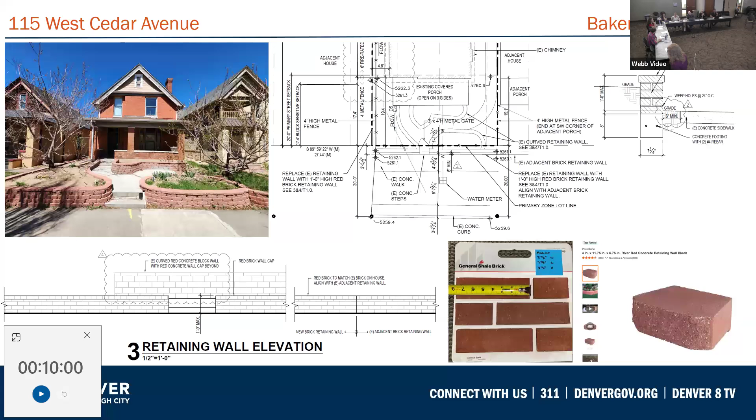Hi, this is Dan Delaney. Hi, yeah, we can hear, can you hear us? We can. Oh, okay, excellent. You've got 10 minutes to tell us about your project, and when you begin that 10 minutes, please start with your name and your address for our records. And take it away. Okay.

Yeah, this is Dan Delaney with Delaney Architecture, Rio Delaney with Delaney Architecture, and Mark Haugen, the owner of the property. Okay. And we're all at the same computer. Okay. Does the computer have an address? The address is 115 West Cedar Avenue. Great, thanks. Yeah. And so you've seen the narrative we sent.

I don't know if everybody had a chance to read it, but we'll start with the siding on the gables that the owner Mark has installed. It's what they call the fish scale, and it's true wood, which is an approved material, and he would like to keep that and feels that it meets the intent of the historic guidelines, and would prefer to have it on all sides, all four gables if possible. At least that's the position we want to take on this.

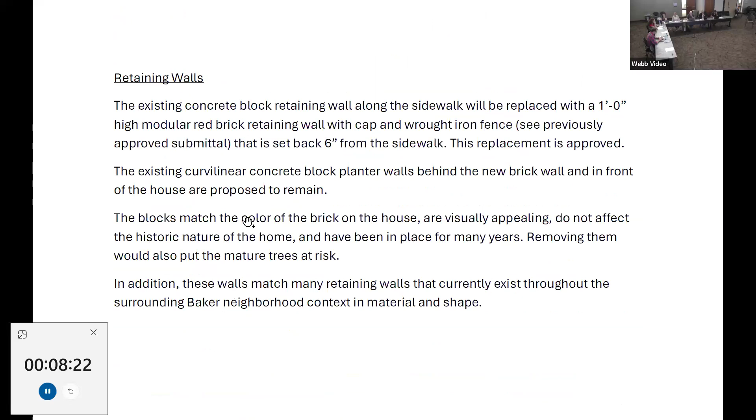And I guess we'll move into the masonry next. Do you want me to do that in this time frame? That'd be great. Okay. On the masonry, we are replacing the front trapezoidal block with the brick that matches the house as best that we could find, and that would be 1 foot high, and that'll go up to the sidewalk but 6 inches back, which is what the right-of-way requested. So there will be a 6-inch gap between the sidewalk and the wall, and then it'll have a cap, and there's a wrought iron railing too that'll be on that beyond the wall a little bit.

And it'll actually wrap on the west side. It'll wrap until it cannot go any further to the back of the house, just because of the grade that's there between the two houses. The house on the west is a little lower, and that retains the dirt, and also the dirt that is at the trees that are there too, to help preserve those.

The trapezoidal planters that are closer to the house, we would like to propose leaving those. We've seen lots of examples throughout the neighborhood, over 20. There's all sorts of examples of it in the neighborhood, and we feel that being closer to the house, it's back far enough where it doesn't really distract from the overall appearance of the house.

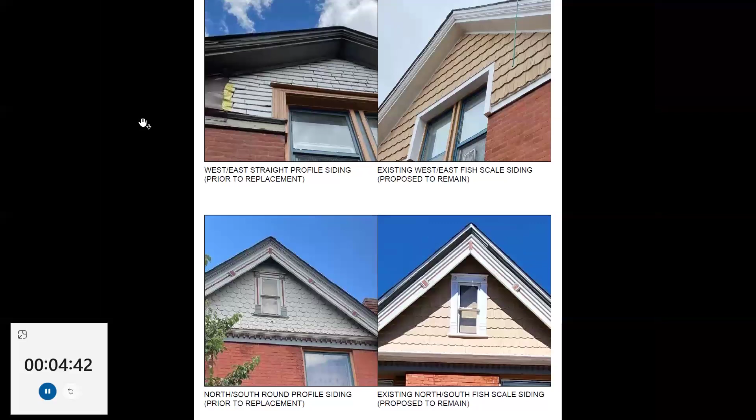This wall that's along the sidewalk would butt up against the existing brick wall that's on the west side of the east neighbor, and so it'll tie into that. The elevation of the grade is about the same for both of those houses. I think that's about all that I had. And you can see some examples that we've taken photos of around the neighborhood that are similar to this house. And some of them have the trapezoidal wall block that's up to the sidewalk. Of course, we're removing that with this property.

And we'd like to have the ones where the planters are back, behind the metal fencing and brick wall, closer to the house. Also, we'd like to keep the curvilinear aspect of those planter walls in the back. And the examples show numerous other locations that use a curvilinear at the entrance walkway. Right, yeah, I did mention that. Yeah, so the examples are in that one attachment of what we saw around the neighborhood, and this isn't even half of them. But we thought these were the best examples that came close to this property.

Also, the wall has been in place for many years. Yeah, how long? I really don't know. I'm guessing 8 or so years. Can you hear Mark? Yes, I can. Okay, very good.

Okay, anything else, Mark? Well, on the shingles, there are other houses that have the fish scale shingles in the neighborhood on the side gables. In fact, my neighbor has a combination of fish scale and rectilinear shingles on the same face. And that's on their west side, which is my east side. Yeah. The west side of the house that's on the east.

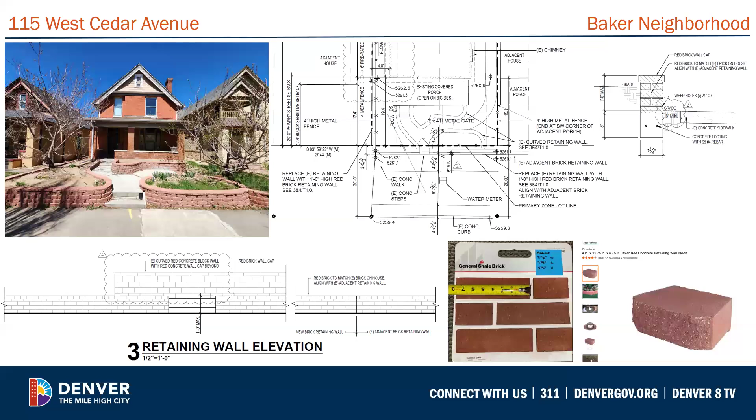Any other questions for the applicant, commissioners? Doesn't look like it. Okay, great. Do we have any public comments? Anybody joining us virtually that would like to make a comment for design review projects? Anyone here in person can raise their hand and talk for 2 minutes. Anybody joining virtually can click the hand raise button on Zoom, or dial *9 on your keypad if joining by phone. You can always email us at landmark@denvergov.org with your name and phone number, and you'll have 2 minutes. Do we have anybody?

Doesn't look like it. Okay, then, being that there's no public comment, Jesse, did you have any other comments? Yes, I do. Could you bring up the presentation again, Brittany?

Sure. Oh, I said sure. Sure, Brittany can. Sure, Brittany will do it. Because she's just so good, I know she can do it.

Which slide do you want? Just the first one will be fine. I'll address these point by point, or item by item within this application. First and foremost, this is the application that is before the commission for review. It is to replace the non-compliant shingle with shingles that better match the historic shingles that were on the house, and the retaining wall at the front being brick, and request for retention of the curvilinear trapezoidal block wall.

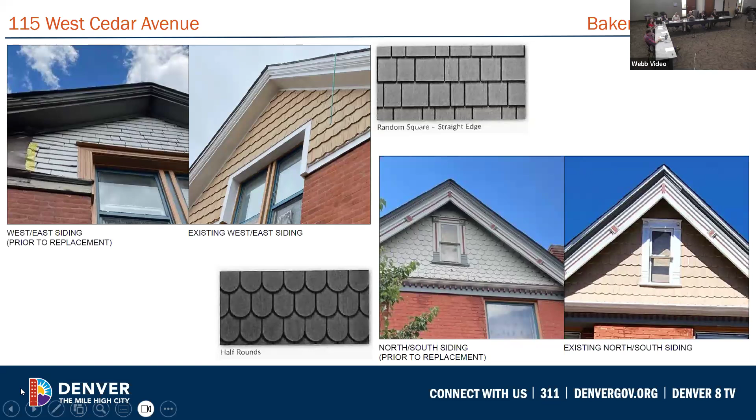Additionally, moving on to the retaining wall. These were not permitted ever. If you go back in Google Street View, sometime between 2014 and 2019, that wall didn't exist. The grade was flat and matched the grade of the surrounding structures. In 2019, you can see that portions of this retaining wall were constructed, specifically the retaining wall on the right-hand side and the retaining wall closest to the house. And there was not a grade change at that time. Then fast forward sometime between 2019 and today, the rest of the retaining wall was added in and the grade was changed. So this wasn't permitted.

It is a zoning violation because of the height and setback, and because of the change in grade. And it is a landmark violation because it was never reviewed by our team. It uses materials that are non-compliant with our guidelines. So moving forward, our recommendation would stay that the retaining wall closest to the house be changed to either a traditional material like brick that would fit our guidelines, or that it be removed altogether. Additionally, what I would say about that is the concern over the trees. Change in material or removal of that wall should not impact the trees. And I would also remind the commission that landscaping trees are not within our purview for review.

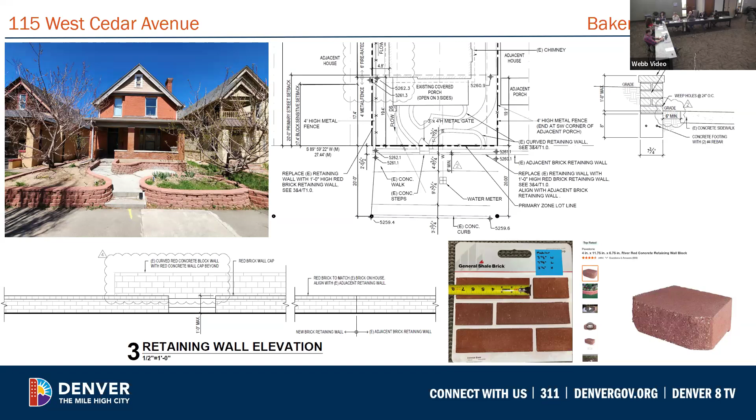All right. Commissioners, any other questions for staff before we go forward? All right, Jesse, Brittany, thank you. Commissioners, let us go into deliberation. So, a little wonky that they were requesting things that aren't in their application. We are discussing the application, not their request.

Any comments? Yeah, Chris? I have a little bit of a hard time envisioning this, the brick knee wall at the front in combination with the trapezoidal block and how that'll kind of look overall. I think it's gonna look a little funky. And I think that it'll draw more attention to the differences between the two than it will kind of masking the two, in my opinion. Okay.

I'm curious how a flat lot ended up with retaining walls, but that's beside the point. I think the trapezoidal blocks are not something that we've approved in the past. And it sounds like the applicant has a plan for the fence that was mentioned; it's called out on the drawings. Looks like it's 4 feet. I don't know if that's a question for staff.

We don't know what that fence is gonna look like. It's noted on just the site plan, but that caught my attention in conversation. It's not there now. It's shown and discussed for installation. But I would agree that if there is gonna be a retaining wall, it needs to match the guidelines.

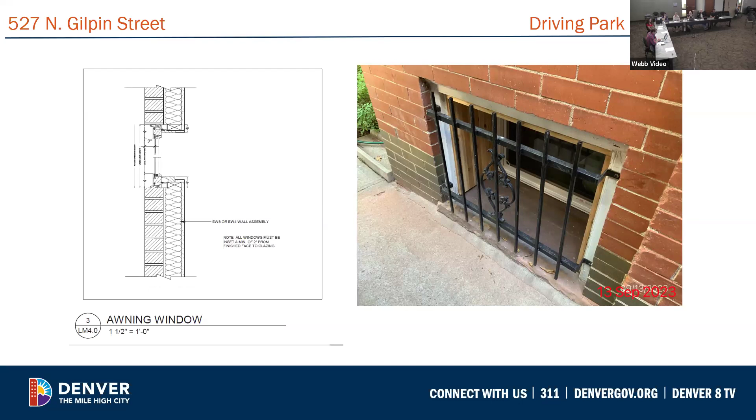The other concern staff has with retaining the existing installed windows is their inset in the wall plane. So you see in this slide, the remediation approval, which still stands, which staff granted in December of last year, required the units to be installed roughly 2 inches back from the face of the masonry wall, which is a standard condition. In this case, the windows are deeply recessed. I assume they are awning windows and that they would swing out towards that grate, and so clearance is needed. But that is an uncharacteristic installation location. So for those two reasons, again, the vinyl material and the inset of the window, the staff recommendation on the application is denial.

Amy, thank you. Commissioners, any questions for Amy? Amy, do you have any documentation of what the windows were before? Do we know? No, we don't. Anything else? Okay, Amy, thank you very much.

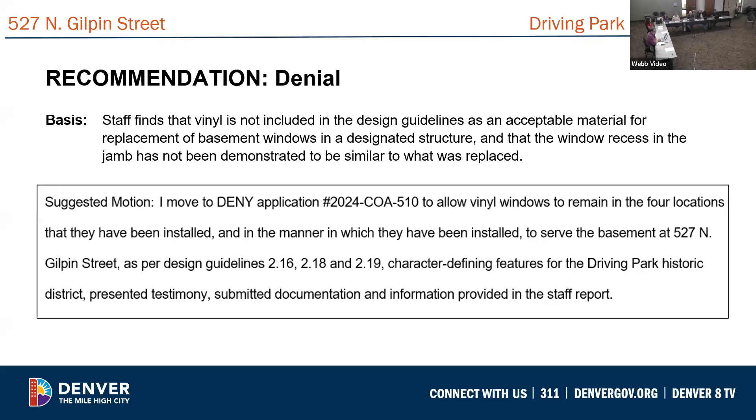Our applicant is here. Yes. Come on up and have a seat, please. You have a picture? Yes, a couple of pictures of the street view that I sent you. Brittany can help go back through the slides I just showed, which included a street view of the house. Go ahead and take a seat. Nice to meet you. Please have a seat. You'll have 10 minutes to tell us about this. And at the beginning of that, please give your name and address for our records. Tom Sisk, with regard to 527 North Gilpin. Great, thank you.

I'd like to apologize probably to the commission here. We've lived in the neighborhood in a different house for a zillion years, and we certainly believe in historic preservation more than anyone. And long story short, we hired a contractor that I relied on to do things properly. A licensed contractor in the city and county of Denver, Town and Country Custom Homes. And we had an architect initially involved that did spec out our remodel, which was mostly an interior remodel. And we didn't really intend to replace any windows until the contractor broke some of the upper windows. And then our architect was not involved at that time. He ordered replacement windows.

If you had a picture of the back of it. Brittany, could you go back through there? I think, there we go. There's the back of the house. Okay, thank you.

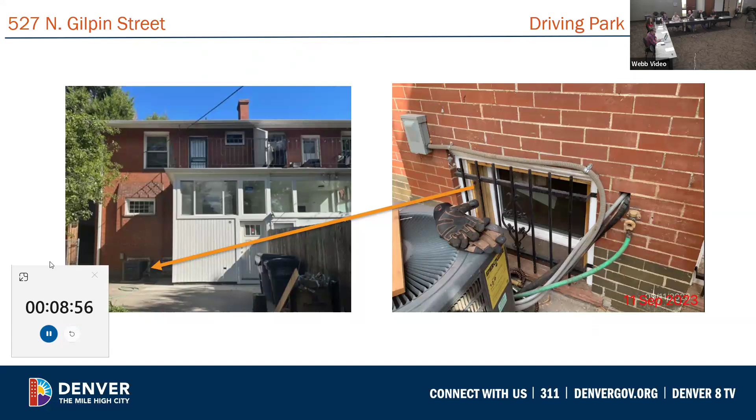These windows up here were busted, so he ordered new vinyl windows. What do I know about vinyl or anything else? And figured that was what was in there, and he never checked with Landmark. He didn't do what he was supposed to do. I relied on him. And so we've agreed to replace these windows up here that you can see. And to do that, it's gonna run me like $18,000. We've got to replace that one up there as well.

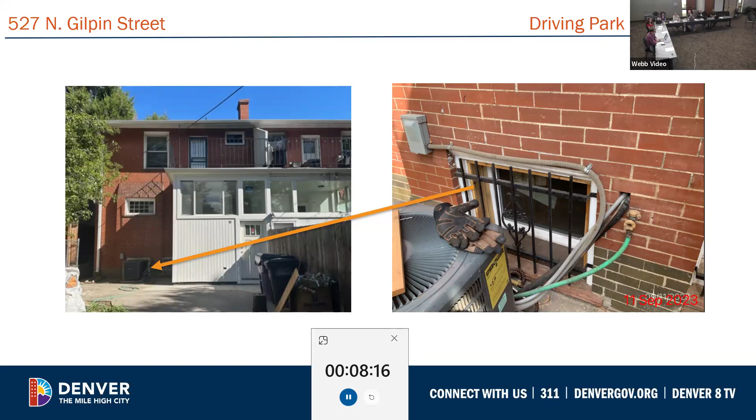There's windows along the side there too that we're replacing. And so I'm paying an additional $18,000 for his mistake because he didn't check with you folks. And I'm just asking for mercy here. At the same time these were ordered, he put in these vinyl windows in the basement, the little hopper windows that you open up. Actually, they look more historic when you look at them from the inside. And we're obligated to replace those as well. That's gonna run me another $5,000 or $7,000 that I simply don't wanna do.

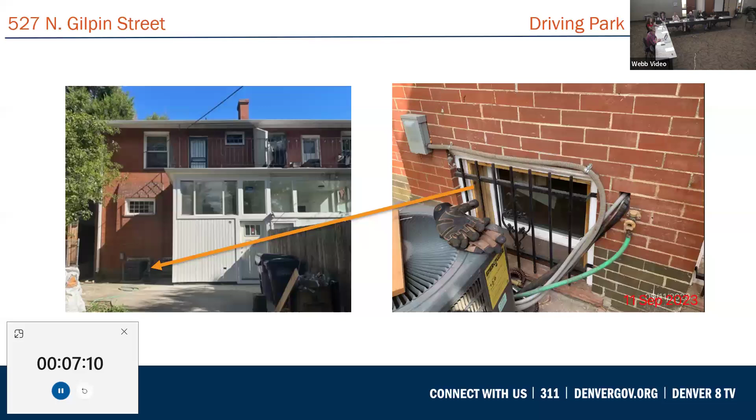So the commission today, I understand the law, you don't like vinyl windows, but it seems to me that if the issue of common sense has anything to do with anything, you can't see these windows. This one here is behind an air conditioning unit. The two other windows are down the side of the house. If you could show the front of the house again. They're down on this side. There's a retaining wall that goes down there, and you simply can't see them.

And I just don't like the theory of having to spend $7,000 or more to fix something that you can't see. So my question is, can you grant an exception on this or not? I have a few other questions, but I open it up with that request. Madam Chairman, what do you think? Well, let's ask the commissioners if they have any questions for you first. Okay, sure. Commissioners, any questions for us? I might add one thing. Sure, certainly.

The thing that bothers me is I'm here. I don't know anything about construction. I barely can start my car. And we relied on this contractor who's actually built things in historic areas. He's doing one now across from the country club area in Gilpin. And he did a major one on 7th Avenue, and he cut corners. He broke those windows, did everything else. He never checked with you guys. And he shouldn't have done that.

For that, I apologize. And I've agreed at least to replace the windows you can see, which is an expense I'm incurring that I didn't think I'd have to spend. And it's irritating to think I need to spend extra money to fix windows you simply can't see. All right, commissioners, questions for our applicant? Yes, I have one. Sure. Have you asked the contractor to reimburse you for replacing his windows? Have you had that conversation? I sure have. And it hasn't gone anywhere?

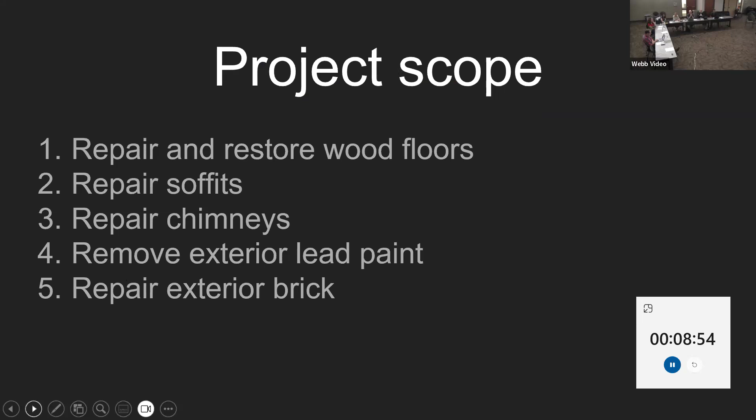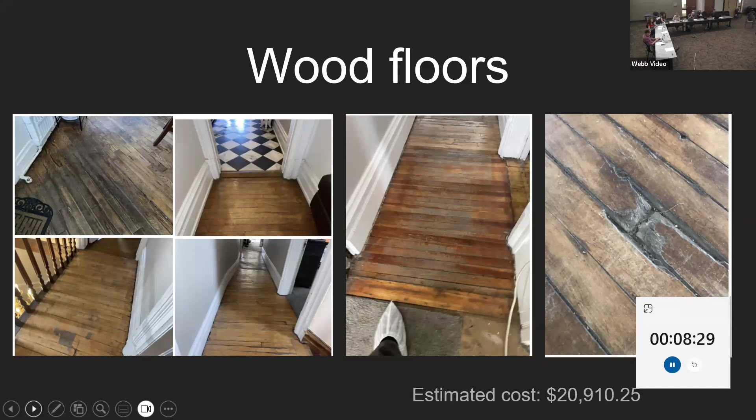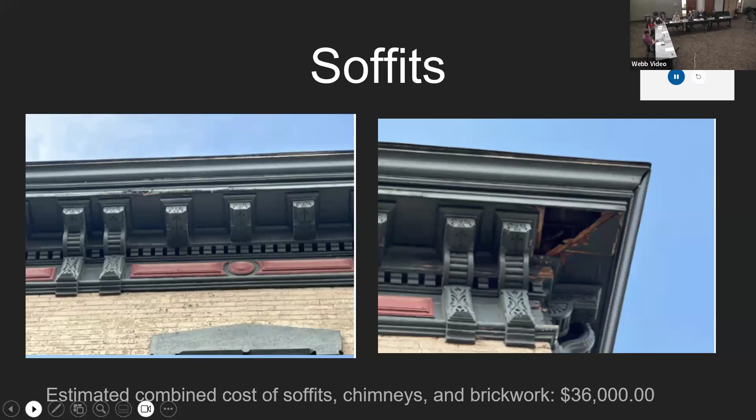Chimneys need brick repair, paint removal, and some of them need crickets placed, as they do not have the support, so we'll be putting in that as well. Advance, now we'll talk about the paint. So terrible condition, peeling, ugly, hideous color. I want to iterate an urgency to this project because we have 2 young children at home and that paint is easily picked up. So we really want to move forward with this project as quickly as we can.

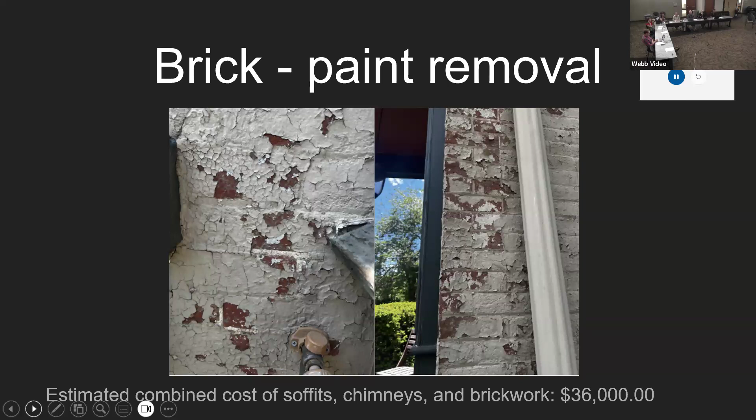You can advance forward. We've talked to over 5 masons. Some of them, right when they walk up, they don't know what they're doing because they're talking about sandblasters and we just say, no, thank you, and have them leave. So we've talked to a lot of people and have done some testing spots. The picture on this slide is an example of only using SmartStrip. And you can see that it does not remove the paint in totality. So there would still be an aesthetic look that is not what we want it to be and a safety hazard in my opinion with 2 young children.

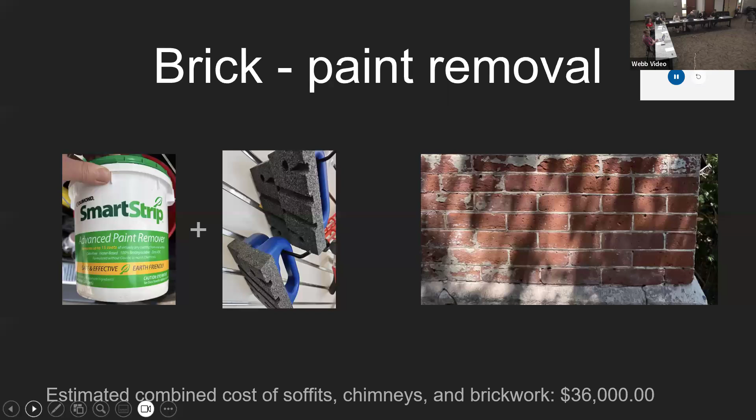You can advance. So we did a test strip of first doing the SmartStrip and then doing some mechanical removal to see if we could get it all out, and that is the outcome there. And we much prefer that. And as Becca discussed earlier, in the process of doing these test strips, it was determined that the fire skin had already been removed at some point. So we feel that in order to restore aesthetics to the neighborhood and overall safety of the condition, removing it in totality using both of these procedures together is our best option. You can advance forward again.

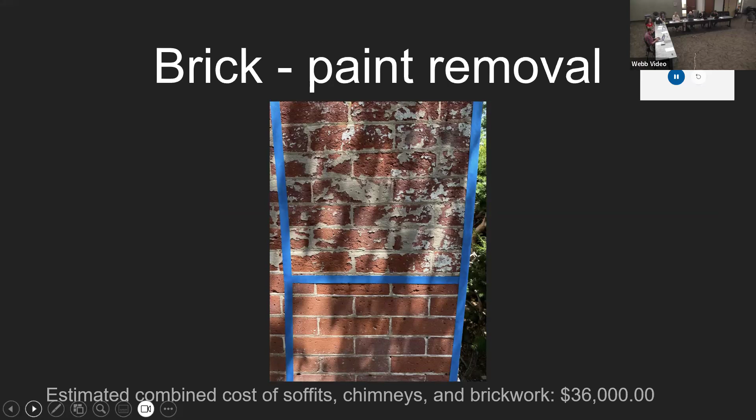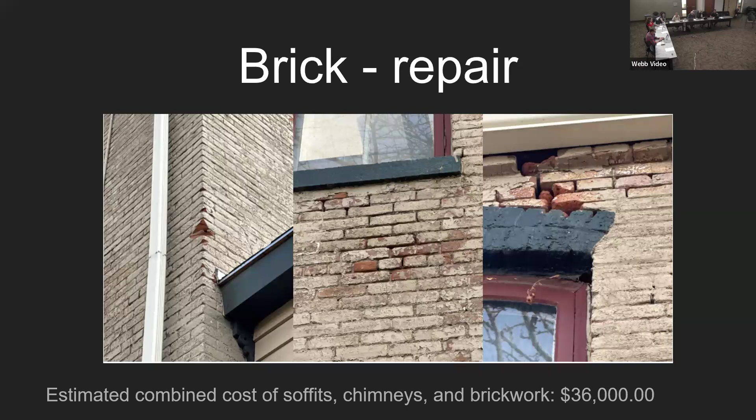Do you have a repointing, like you're gonna do some mortar work as well? There does appear to need some mortar work, to my naive eyes. The individual we are using, his name is Ruben Rivera. He's done most of the historic homes in the Curtis Park District. He's also lead paint certified, so he is very experienced. Anybody else? Okay, great, thank you very much.

You're welcome. Thank you. Okay, so there's nobody here for public comment, so is anybody joining us virtually, Eric? If you are joining us virtually and you would like to speak, then please click the hand raise button in Zoom or dial *9 on your keypad to raise your hand. Or you can email landmark@denvergov.org with your name and phone number. Do we have any hands raised? Oh, we do have somebody, okay.

Hello, can you hear me? We can hear you really well. Can you hear us? Yep. Okay, just wanted to say, this isn't about this project? Oh, it isn't? It was just that it sounded like this is the last project you're talking about. It is. Oh, I just thought I was on the agenda for window replacement at 3441 Alcott. I'm happy to talk to you at the end. That application has been approved, Scott. If you want to reach out to Jesse following the meeting. Okay, that's great. I didn't know. That was on the consent agenda, so you're all set. Okay, cool. Thank you. Bye.

Appreciate it. Okay, is there anybody who would like to make a public comment on this particular project?

Okay, it doesn't look like it. All right. Okay, did you have any other comments, Becca? Just that in the application, they did include a line item for it. There is, okay, yeah. Okay, great. Then commissioners, let us go into deliberation. I'm gonna queue up Chris for this.